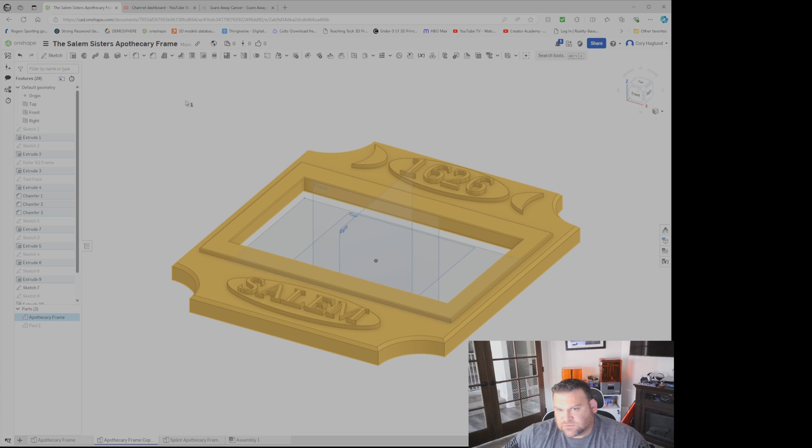What I've done is select the part itself down here. You'll notice I have the front and right planes hidden, so I'm going to unhide those so we can see them. Then we're going to come up here at the top and select Split.

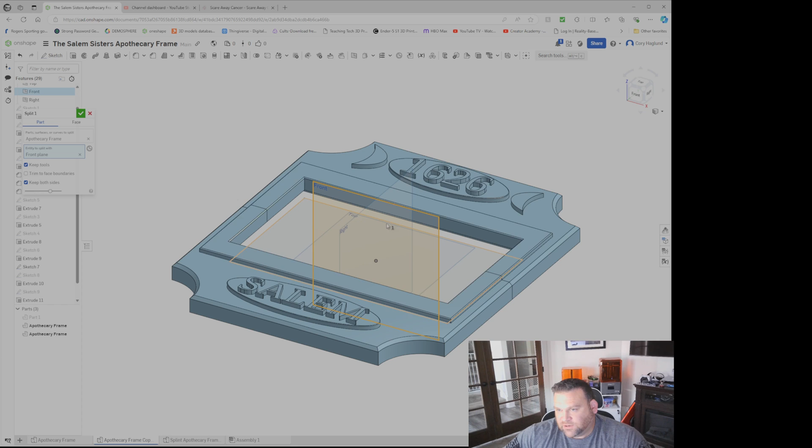The part we're going to be splitting is of course our frame, and we need to decide what to use to split with. In this case, we're going to use one of the view planes, which is why I unhid those. We'll click the entry to split with and select the plane we want to use—in our case, the front view. This cuts right along the center axis point, creating a top and a bottom frame piece. From there, I'm going to hit OK.

Now you'll notice down here we actually have two parts, one top and one bottom. Just so we don't get confused, we're going to rename this bottom one and add the word 'bottom.' Then for the top, we'll do something similar and add the word 'top,' so it's very clear which piece I am working on.

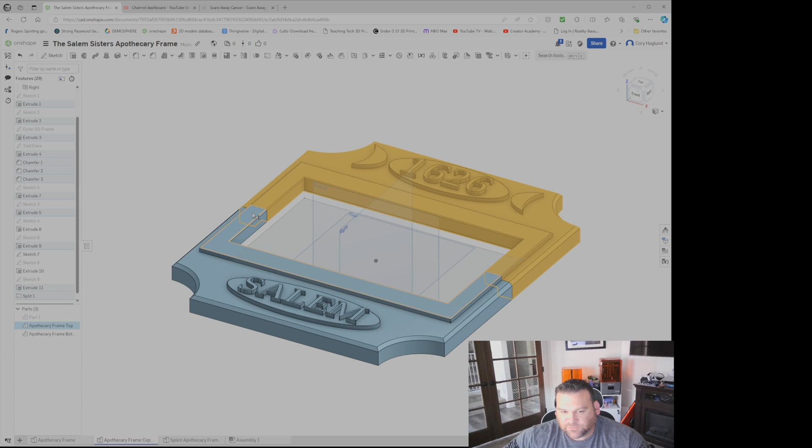Next, we're going to work on only one side at a time, and we'll create a sketch plane that sits between the top and bottom. Let's hide the bottom frame here so you can see we're working on this top plane. We're going to create a new sketch plane right here, which now goes across the entire bottom of this top piece.

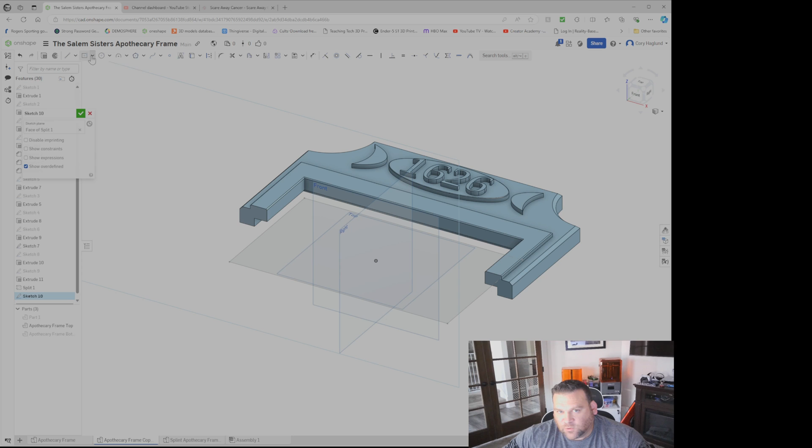From there we'll go up here and select what shape we want to use—in our case, a center rectangle. Let's bring this to the front so we get a very clear mark. I'm going to take the most central point and draw a square in here, using a 7 by 7 size, which seems to be a good size.

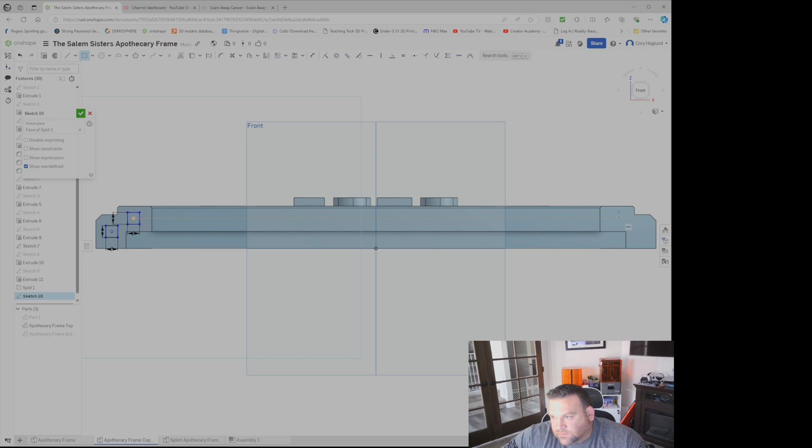We'll take the center point of this plane here and do the same thing, making a 7 by 7 square. Then we'll do the same thing over here, and I'll try to get it so it's on the same plane, so that when I draw that square it aligns. Again, we're going to do a 7 by 7—so we've already got a 7 by 7.

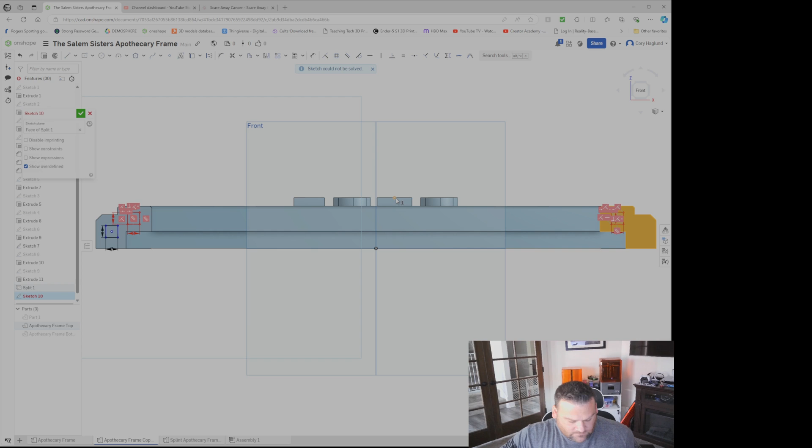We don't know what happened there. There we go. And we're going to do this, and do the same thing. We're going to kind of grab that center point, and again do a 7 by 7.

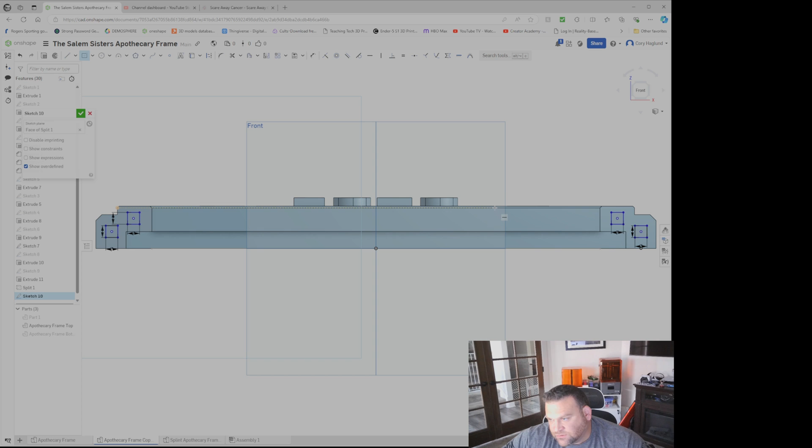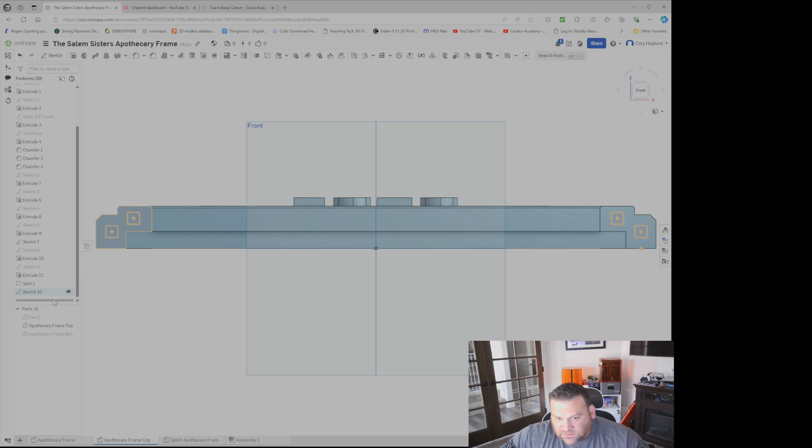Okay, so now that we've got our squares drawn in, what we're going to do is actually extract or extrude one square on each side and then cut away the opposite side. The purpose of that again is to add some strength to those joints. So I'm going to go ahead and select, in this case the bottom and the top, and we're going to extrude those out.

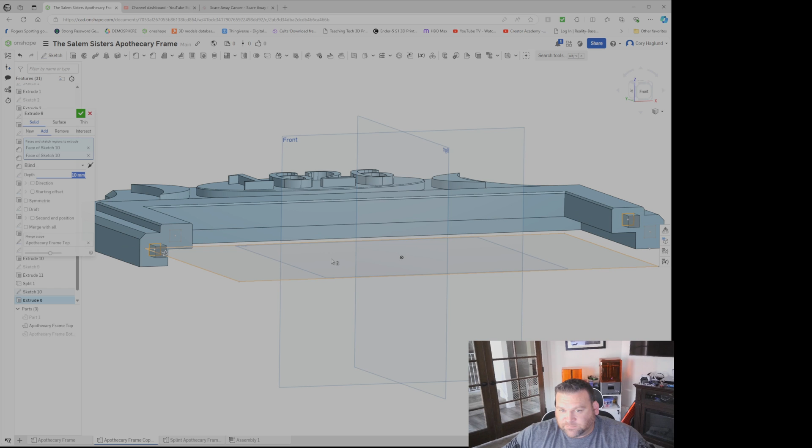So we're going to hit extrude. I'm going to change the angle so you can see how this is extruding out. Let's go 10 millimeters in this case. So you'll see both of these have now extruded out from that top piece.

We're going to hit OK on that, unhide our view, and now go ahead and select the other squares. So this square and this square over here. Make sure you get the actual square. Then we're going to do the same thing, hit extrude, except this time we're going to do remove.

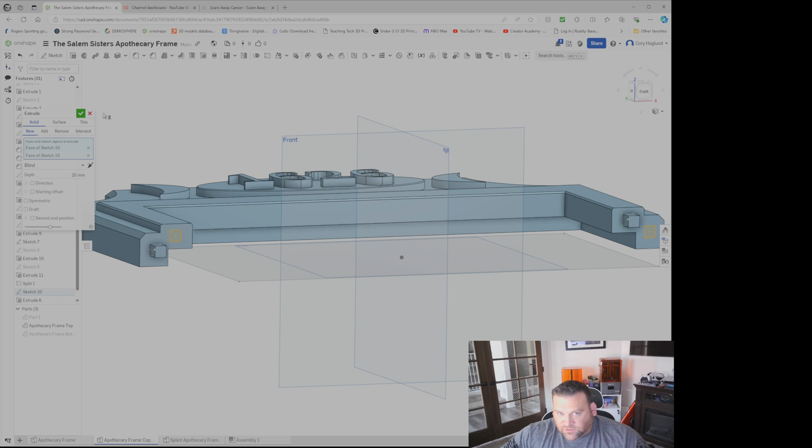And you'll notice now it's actually cutting into the part. So same thing, we're going to go 10 millimeters. And you'll notice both pieces have actually cut now inwards. We're going to go ahead and hit check on that.

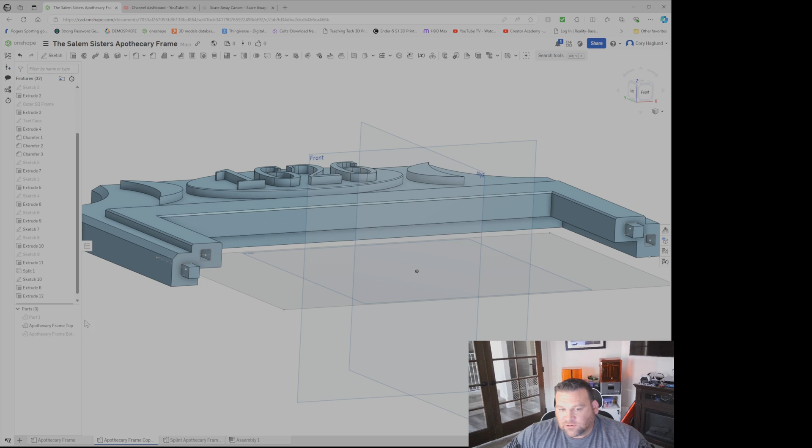So now, to get the opposite side so that it fits into its corresponding part, we are now going to change our view. We're going to make the bottom frame visible, hide the top frame, and flip this over to the back side so we can see what we're working with here.

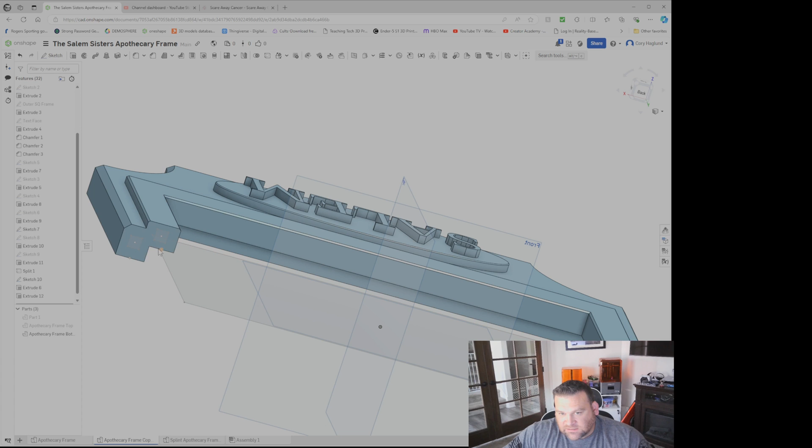A couple ways to do that. Then what we're going to do is go ahead and do the exact same thing we just did, except one thing I do need to look at real quick is figure out which one's where. So we need to make this one extrude in our case.

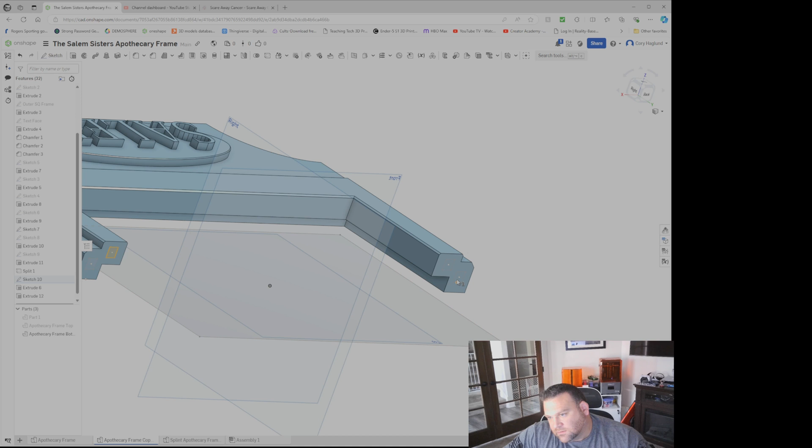So we're going to hide this, unhide this. We're going to cut this one away, and we're going to cut this one away. So those are extruding in.

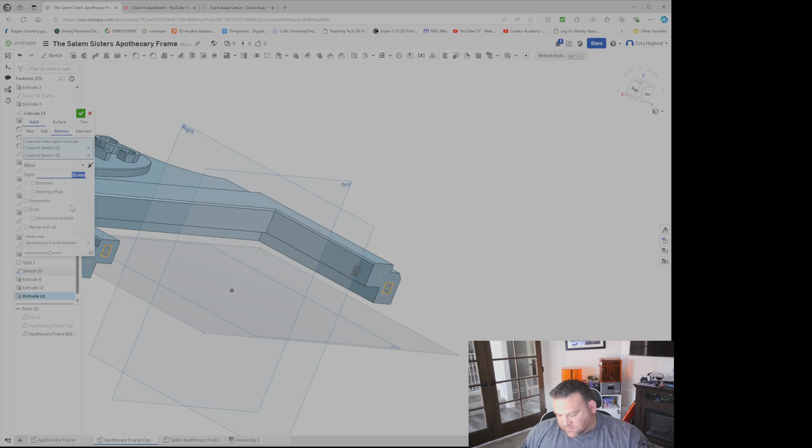So again, we're going to do our extrude. We're going to go remove, and rather than cutting away this direction, we want to flip this so we actually go inside the opposite plane. We're going to go back to 10 millimeters here, hit OK on that, and now select our other square.

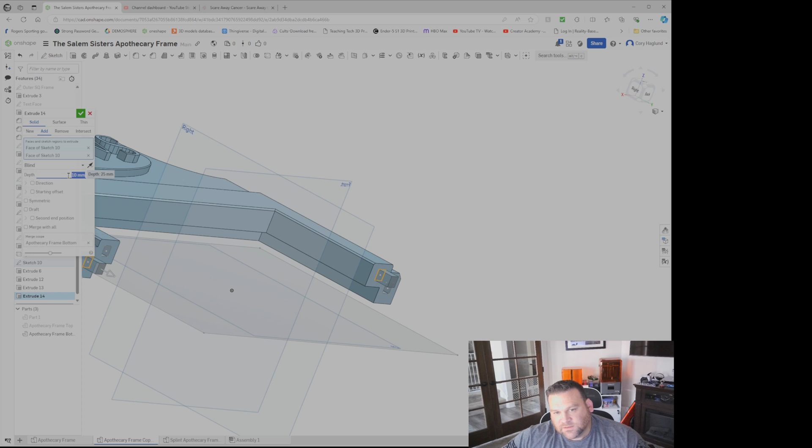Same thing, we're going to extrude those out. Again, flip it so it's going the correct direction. Put this at 10, and you will now see, once we hit check here, if I go to this view, you'll see the extruding piece on each side.

So if we hide the one side and unhide the other, you should notice how the corresponding pieces intersect with each other. That is how you create joints after you slice something in half, so that when you assemble and put it together, you're going to have a much stronger joint piece. Still put some glue on these, obviously, but that's going to create a much more cohesive piece, and hopefully it'll be more stable when you assemble it.